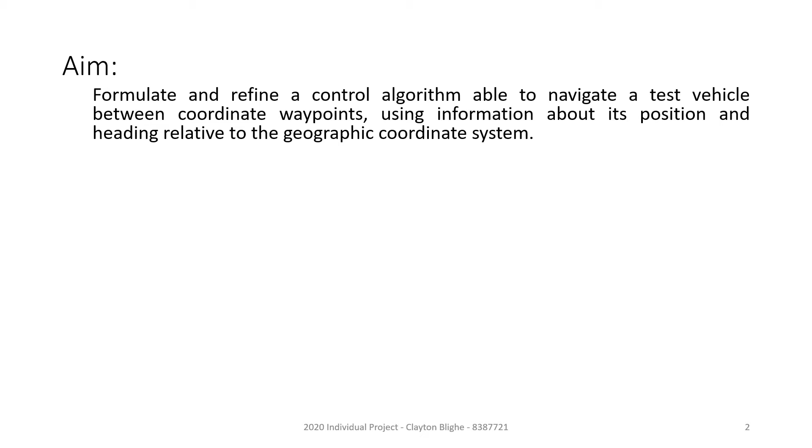This presentation will detail the progress made on my individual project report, which entails the design and implementation of a steering angle and road speed control system for a prototype autonomous car. The aim of the project is to formulate and refine a control algorithm which is able to navigate a test vehicle between coordinate waypoints, using information about the car's position and heading relative to the geographic coordinate system.

The objectives are as follows. First, to conduct a literature review to investigate the current research landscape which is relevant to the project. Second, to research the hardware requirements along with the underpinning scientific principles that must be understood to complete the project. After this, hardware will be selected based on the newly acquired information.

Third, to design and construct a circuit and test vehicle. Fourth, conceptualize the control algorithm, then write a program which encapsulates the algorithm using the C++ programming language. The fifth objective is to test and refine the algorithm using a series of increasingly challenging waypoint reaching missions.

Now, to date, objectives 1 to 4 have been completed in their entirety. Objective 5 is still in progress. The car is currently slightly unstable in that it oscillates along the line it should be following. Additionally, there are some bugs that need to be fixed before the algorithm is fully refined.

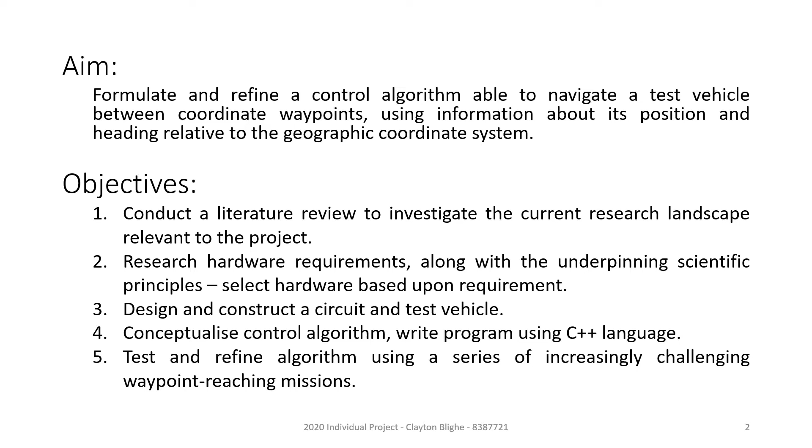This slide details the hardware that was selected after objectives 1 and 2 had been met. To orchestrate the control system, a microcontroller is required. Its role is to take measurements from sensors, perform mathematical calculations, and output control signals to actuators. The Teensy 4.0 was chosen for this project as it has a very high processor clock speed and a large memory availability, which allows for complex programs to be stored and executed.

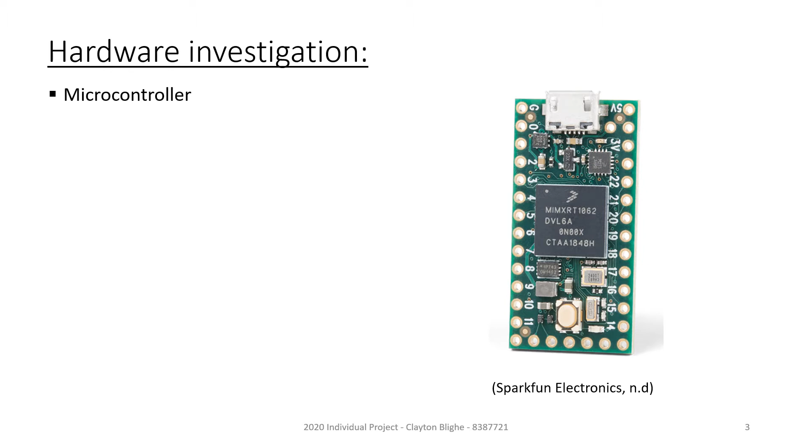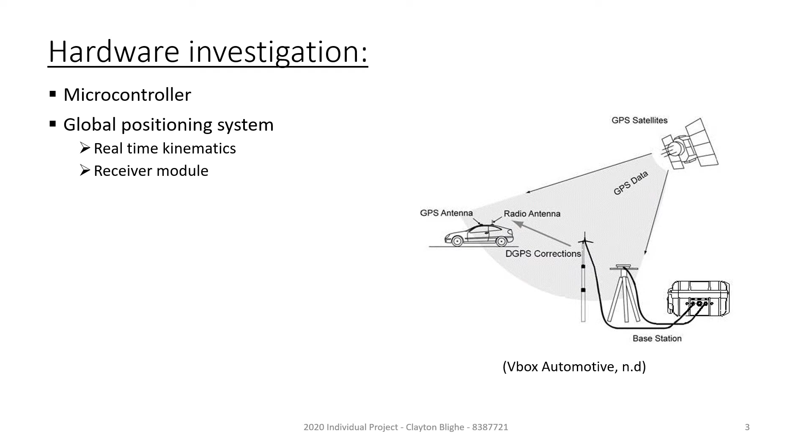For macro position measurement, the global positioning system was chosen as it's really the only option for this application. The accuracy of generic GPS is limited to around 2 meters. However, real-time kinematics, or RTK, can bring this down to around 1 centimeter. The configuration of RTK is displayed on the right, where you have a base station and a rover module. The base station sends RTK corrections to the rover, which incorporates said corrections into its location solution, giving the 1 centimeter positional accuracy.

Not all GPS receiver modules support RTK. The Ublox ZED-F9P does, however, and was selected for this project because it's cheap and has good library availability through SparkFun.

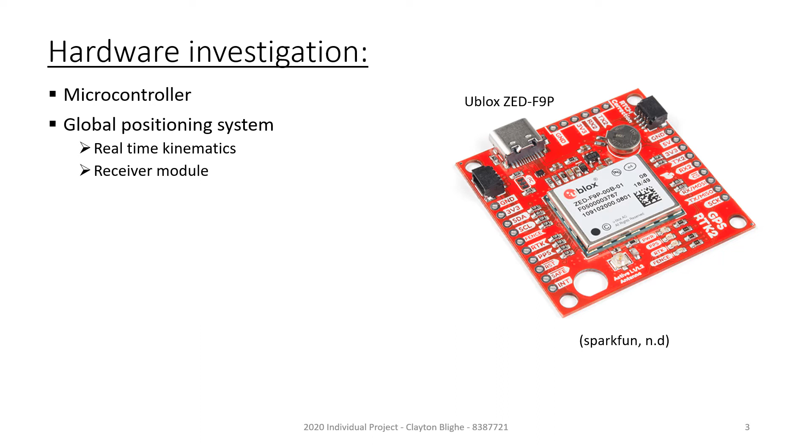To measure the car's heading relative to the geographic coordinate system, a magnetometer is required. It measures the magnetic field strength in X, Y, and Z directions. These three can be used to find the absolute heading of the vehicle. The MPU 9250 was chosen due to its low price and, again, library availability through SparkFun.

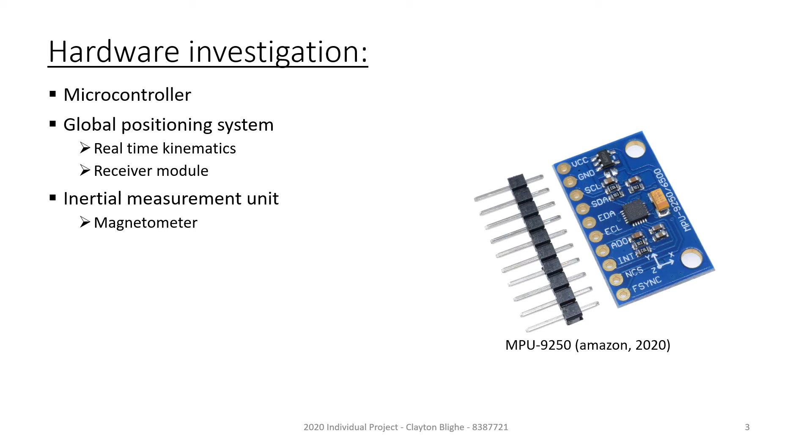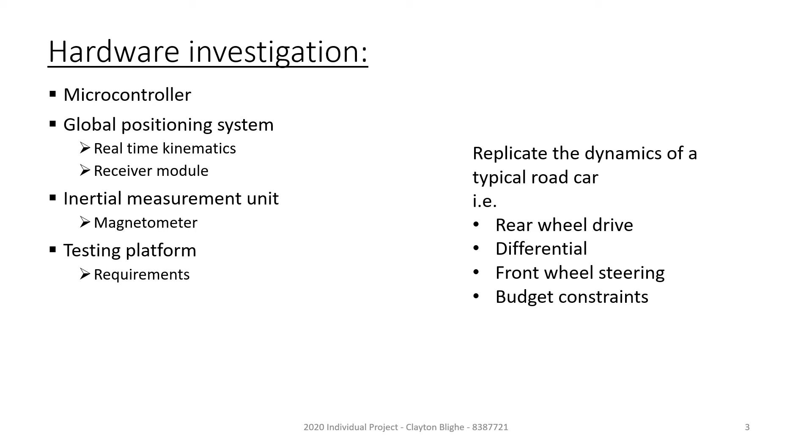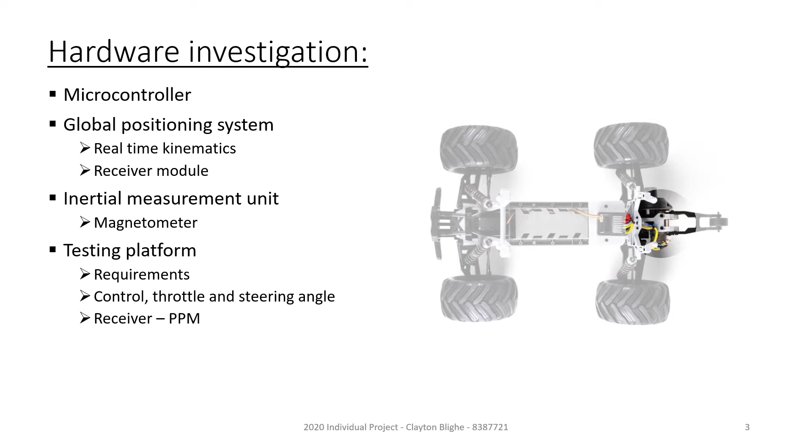And a DC motor at the back, which can be controlled using an H-bridge. The Funtech Furio also has a wide array of mounting holes in the center, which will be useful for mounting control electronics later on.

So the configuration of an H-bridge is shown on the top right. H-bridges allow for bidirectional motor control of speed and direction control. The BTS 7960B was chosen as it has a very high current throughput ability and is unlikely to burn out in testing.

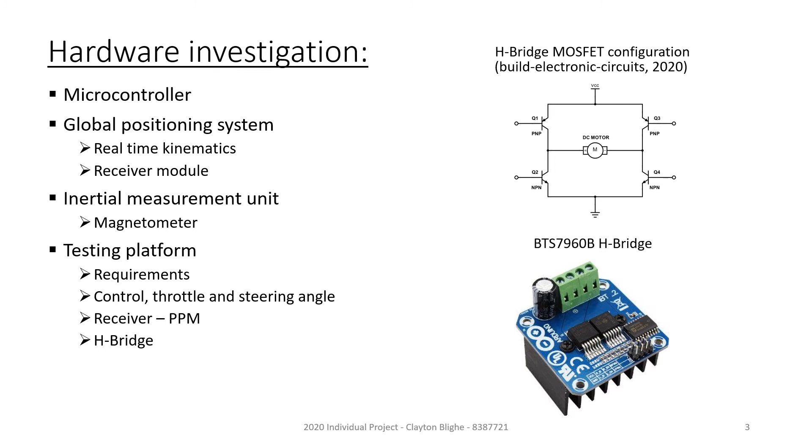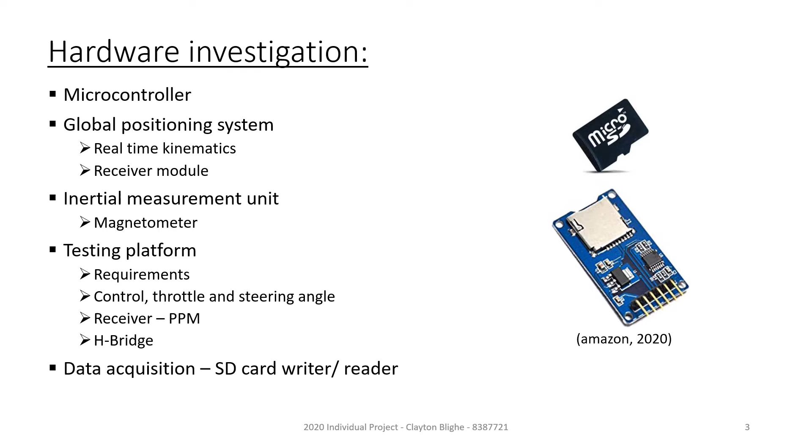For data acquisition, an SD card was chosen. It's necessary to record data about the control inputs, outputs, position and heading, etc., to assist in algorithm refinement. The SD card was chosen as it's very simple to take the SD card out of the car and put it into a computer and manipulate the data.

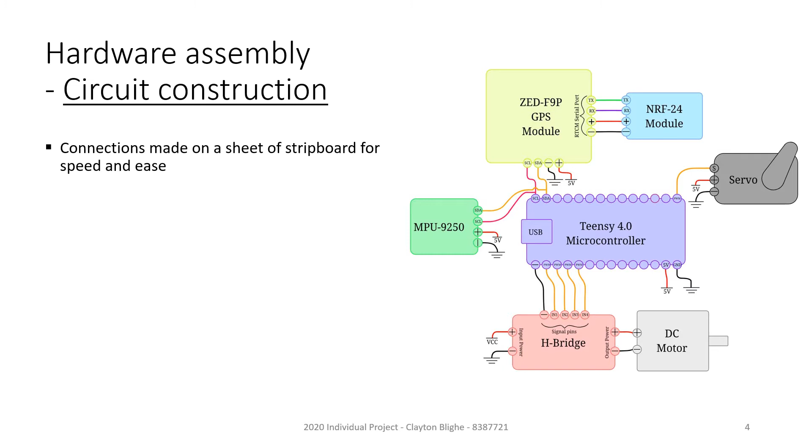The first step in meeting Objective 3 was to construct the circuit. A diagram is shown on the right of the relevant components. All connections were made on a sheet of stripboard for speed and ease of fixing mistakes and changing configuration options. The circled SDA and SCL are the data and clock lines of the I2C communication bus.

This was used to interface the GPS and the MPU 9250 with the Teensy. A serial port UART connects the NRF24 module with the GPS, and it feeds in the RTK corrections, which are sent from another ZED-F9P module.

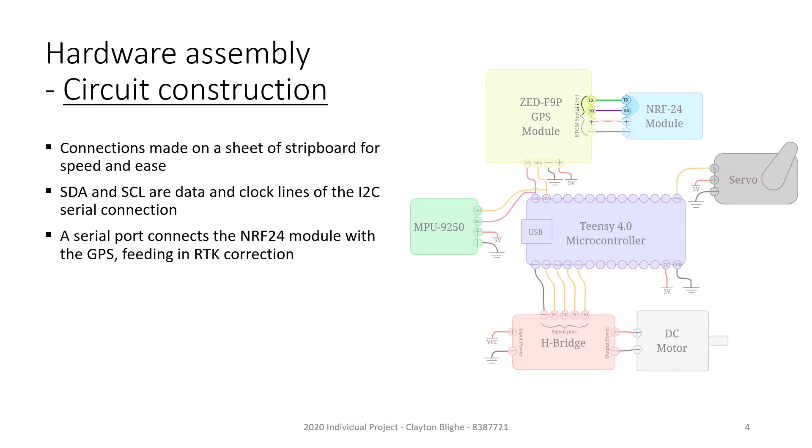This acts as the base station and sends out RTK corrections. Orange is circled and indicates the PWM signal lines. Four are used for the H-bridge speed and direction control, and one goes to the servo motor and controls steering angle.

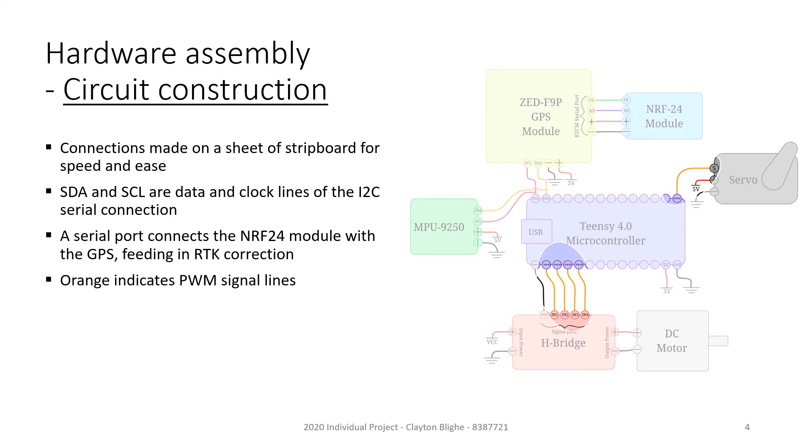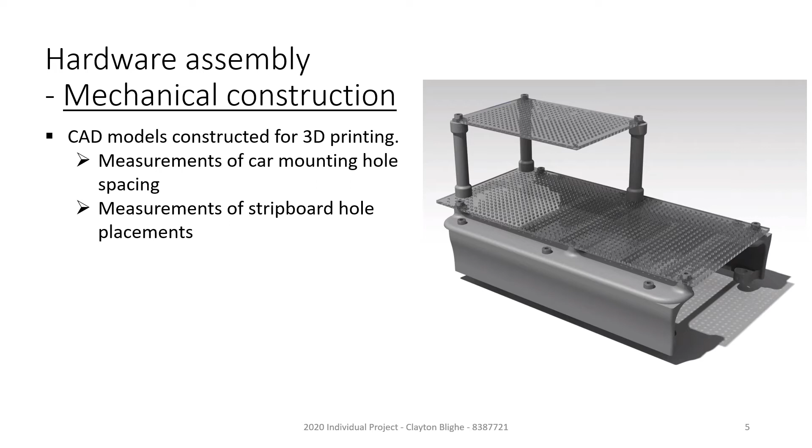The second stage in meeting the third objective was the mechanical construction, which involved mounting the control electronics to the Funtech Furio test vehicle. CAD models were constructed for 3D printing using measurements made of the car mounting hole spacings and the measurements of the stripboard hole placements as well.

Once these parts had been printed, the boards were assembled. The second board is mounted with a separation to ensure that the magnetometer readings aren't interfered with by the currents flowing in the motor or in the stripboard.

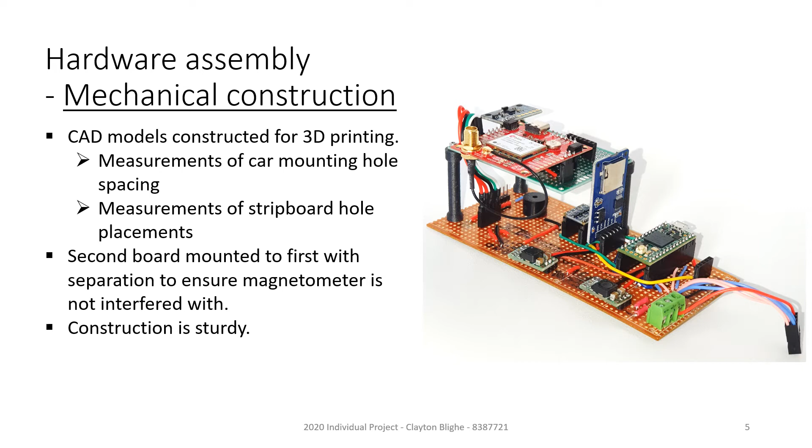The construction is fairly sturdy and, as you can see in the video, is fairly tidy. The H-bridge is mounted between the motor and the control electronics.

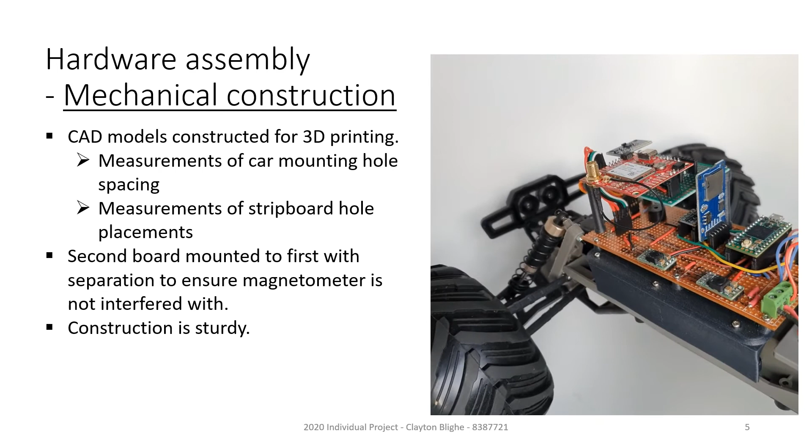The first step towards meeting Objective 4 was to conceptualize the control system. The nature of the project calls for a multiple input, multiple output system in which the inputs are the car's position and heading, and the outputs are its steering angle and the motor speed.

To organize the code, a state machine approach was used, where the two master states are the autonomous and manual modes. Switching between these two modes is affected by channel 8 on the radio transmitter. In one position, the car will be in autonomous mode, in the other position it's in manual mode.

In manual mode, the throttle control is the right stick y-axis and the steering angle is the right stick x-axis. So the car is driven around the desired course, and channel 6 is activated at junctions and turning points, at which point the car saves its current position as a coordinate waypoint to be reached later when channel 8 is switched into autonomous mode.

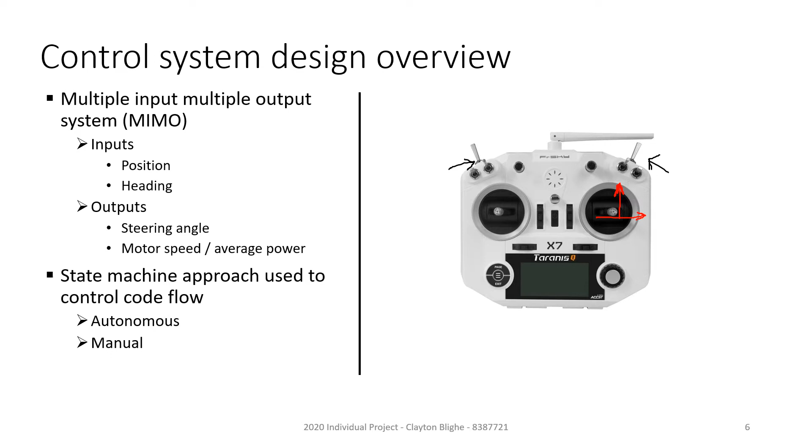So the code flow is as follows. First, sensor readings are taken. Then the PPM channels from the transmitter previously pictured are read and stored in memory as global variables. Then the mode is checked.

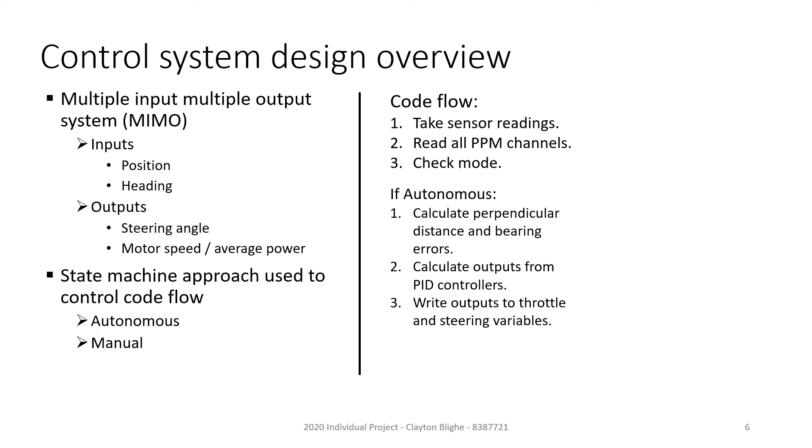If the mode is autonomous, the perpendicular distance and bearing errors are calculated. Then the outputs from the two PID controllers are calculated, and thirdly, the outputs are written to the throttle and steering control variables. If the mode is manual, the receiver channels shown previously are written directly to the throttle and steering control variables.

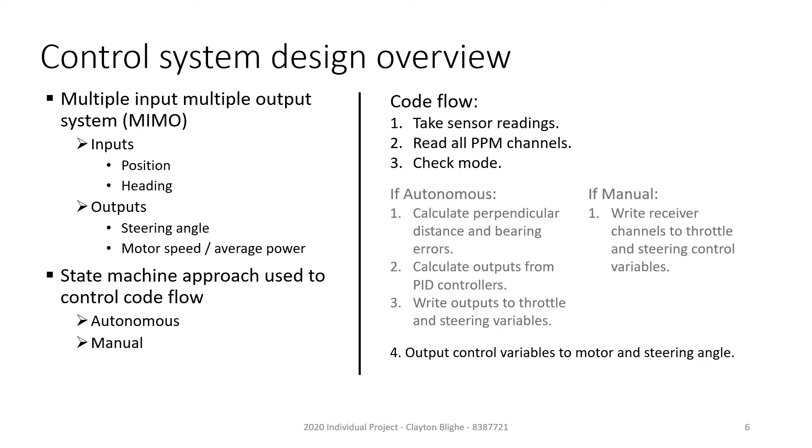Lastly, the control variables are written to the H-bridge, which controls the motor, and the servo motor, which controls the steering angle.

In the last slide, I mentioned two errors. Number one was the bearing error, and number two was the perpendicular distance error. In order to ensure that the car follows the line joining the last waypoint with the next waypoint, the so-called desired path, both of these errors are relevant.

Error one is fairly simple to calculate. It's just the car's heading subtracted from the heading towards the next waypoint. And ideally this should be 0. The car should be facing towards the next waypoint in order to reach it.

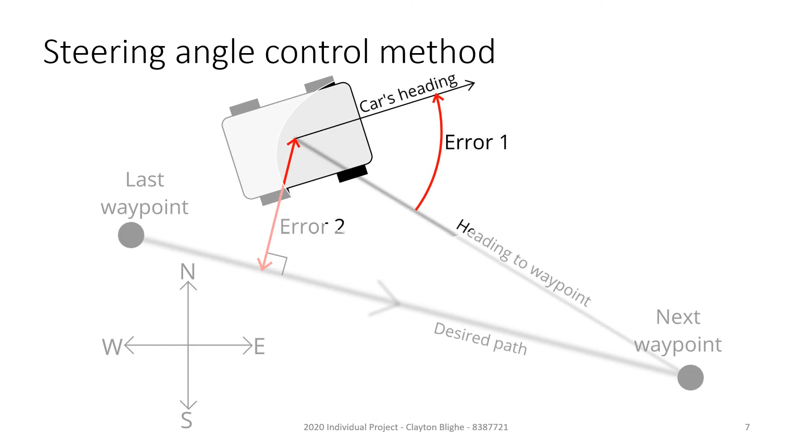The second error is the perpendicular distance between the car's current position and the straight line which joins the last waypoint with the next waypoint. This is a little more complex to find, but involves determination of a straight line function which joins the last waypoint with the next waypoint, then finding the equation of a line which is perpendicular to that line, and finding the distance along that perpendicular line between the car's position and the desired path. Again, this error should be 0.

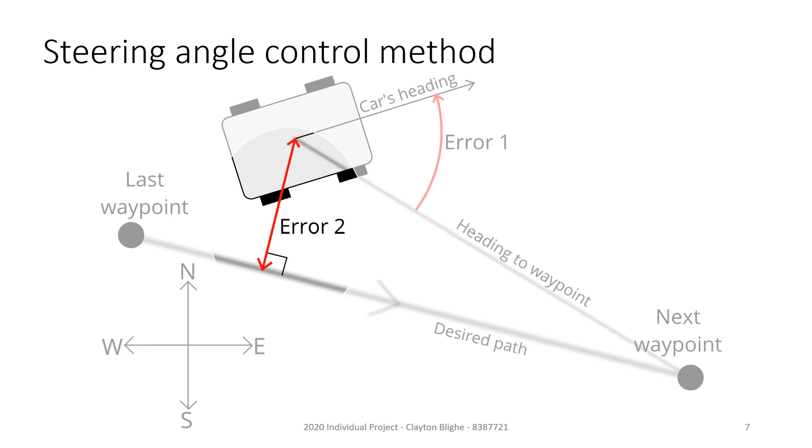Anti-wind-up is incorporated into both PID controllers and prevents the integral term from increasing uncontrollably whilst the steering angle is at a maximum. Additionally, a low-pass first-order filter attenuates the derivative noise.

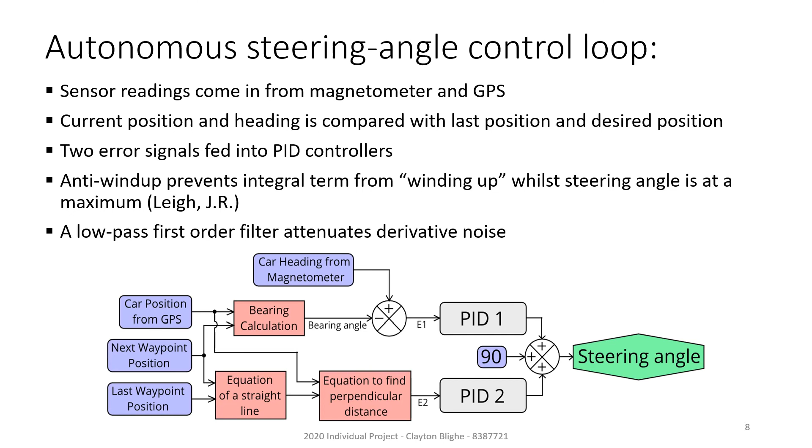Raw magnetometer readings are notoriously noisy and require filtering to be usable. If raw readings were used in a control system, the control actions made would undoubtedly be unpredictable.

So an infinite impulse response filter was used to filter the magnetometer readings instead of a finite impulse response filter, because they give sharper and faster responses, according to Siemens. The only downside to infinite impulse response filters is that they require floating point operations to be made, whereas finite impulse response filters only use integers.

Thankfully, the Teensy 4.0 has a very fast floating point unit, which allows it to deal with floating point operations in the same way that a standard microcontroller would deal with integer math operations.

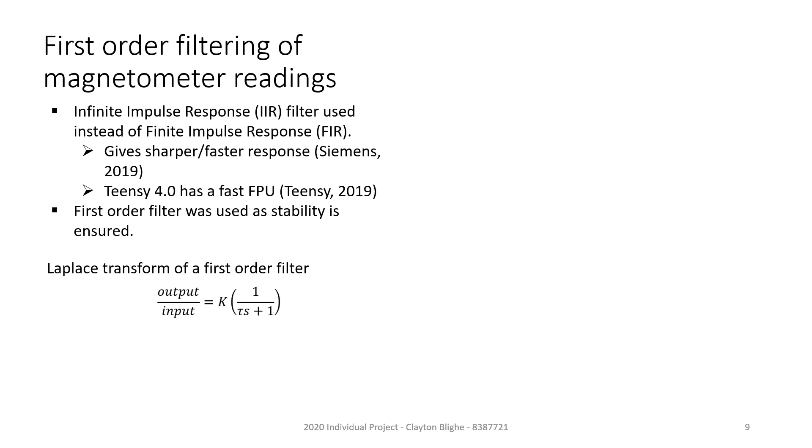So the filter was kept as a first order filter just to ensure stability and to simplify the filter design and tuning. The Laplace transform of a first order filter is shown there, given by k, the gain, multiplied by 1 divided by tau s plus 1, where tau is the time constant of the filter.

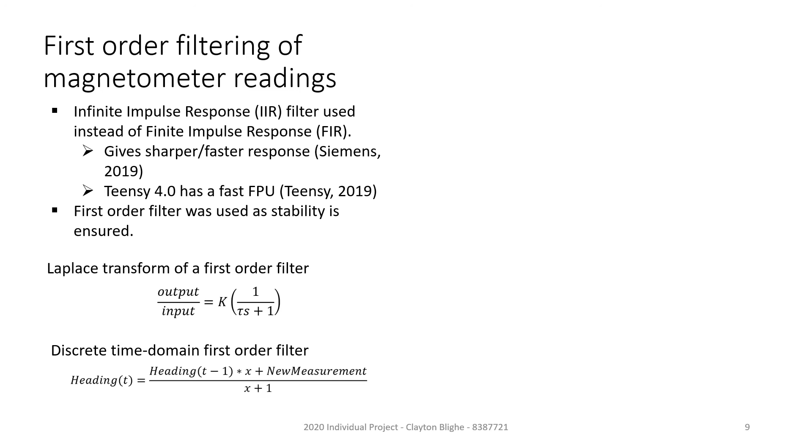In the discrete time domain, for this example, the heading is equal to the last heading at t minus 1 multiplied by the filter weighting, summed with the new measurement, all divided by x plus 1. That was the form that was implemented in code.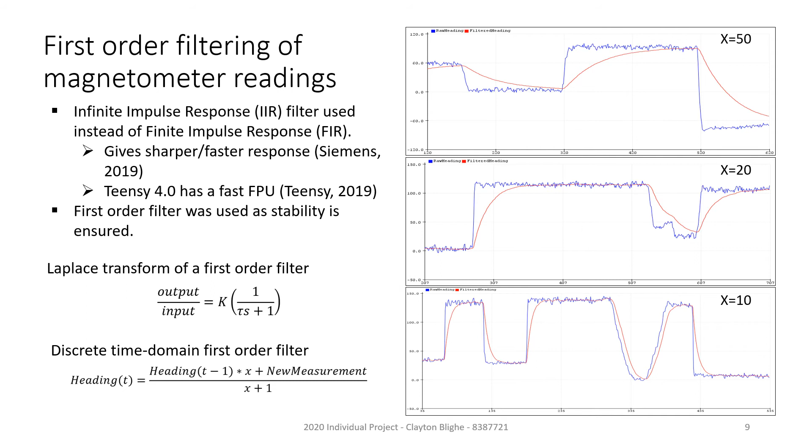X equals 10 was chosen as the final value for the filter weighting as it was deemed to give the optimal response.

For road speed control, the algorithm is a great deal simpler than for steering angle control and works based on the distance to the next waypoint. This distance is calculated using a Pythagoras equation, squaring the latitude distance and the longitudinal distance, and finding the square root of that to find the distance to the next waypoint. When this distance is greater than 3 meters, the car travels at a constant speed.

As soon as the car goes within 3 meters of the next waypoint, a proportional controller kicks in and gradually reduces the speed of the car to around half of its original speed. This is just to ensure that the car doesn't overshoot the next waypoint too much, and additionally there is a minimum speed limit imposed so that the car does not come to a stop.

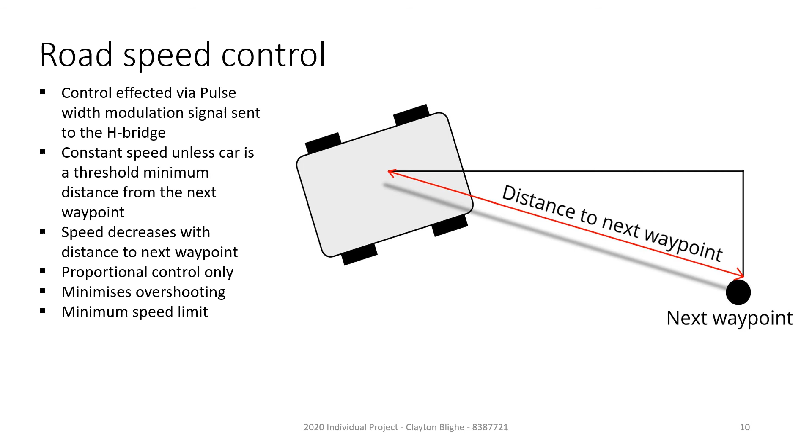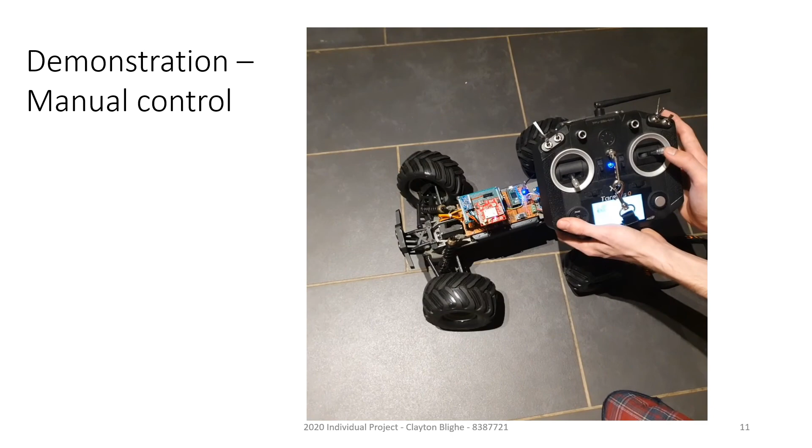So this slide demonstrates that the manual section of the code is fully complete and operational. You can see the steering angle and bidirectional control of the motor speed has been effectively implemented.

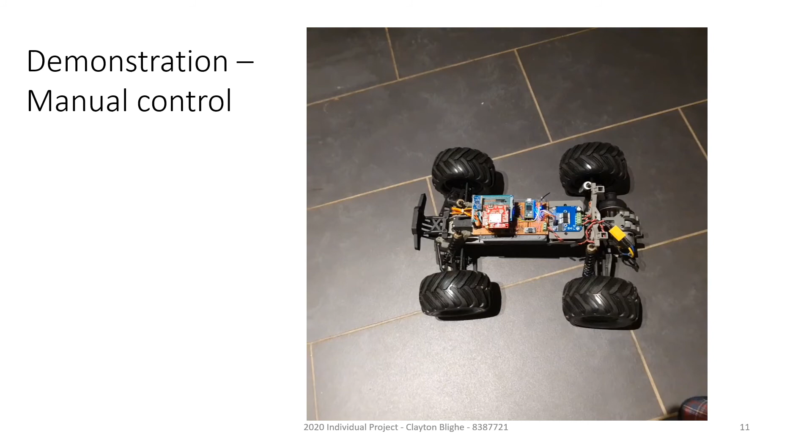So I suppose the first thing I can think of is that nobody else in the literature has documented calculating the perpendicular distance from the car, or the autonomous rover, to the line which joins the last waypoint and the next waypoint.

This was my own idea, and as far as I can tell, it's novel. The second thing would be that, as far as I could tell, nobody else has implemented RTK for this application. RTK will allow this car to be steered through obstacle courses that cars which don't use RTK would not be able to navigate accurately or reliably.

Also, the filter design for filtering the magnetometer readings is completely novel and was created specifically for this project by me.

So the way that most other projects that I can find effect steering angle control is through bang-bang control, which leads to oscillations, so the steering angle will never settle at 0.